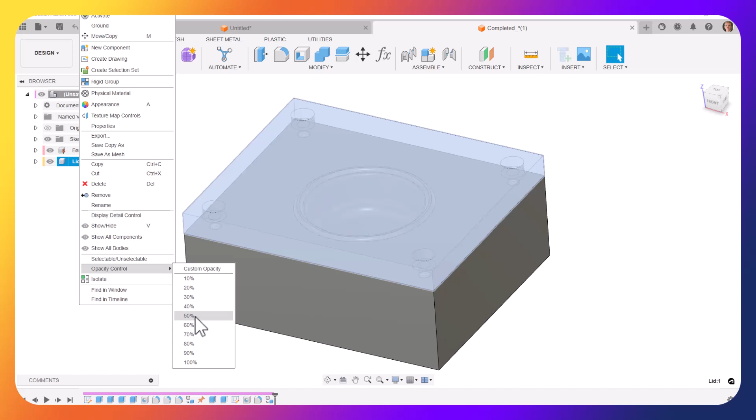Let's take a look at how I put these 4 holes into the lid. First, in order to make this clear to see, I changed the opacity of the lid so that we can see through it and see that these holes in the lid line up with the holes in what I call the base. I'm going to drag back in the timeline to before I created those holes.

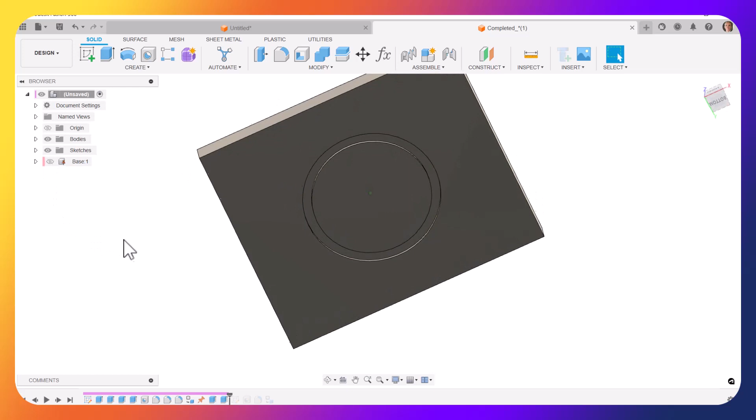So let's drag this back, and here's my lid. I'll turn off the base, and later on I put the fillets in here for the O-ring, but let's go ahead and put the holes in here again.

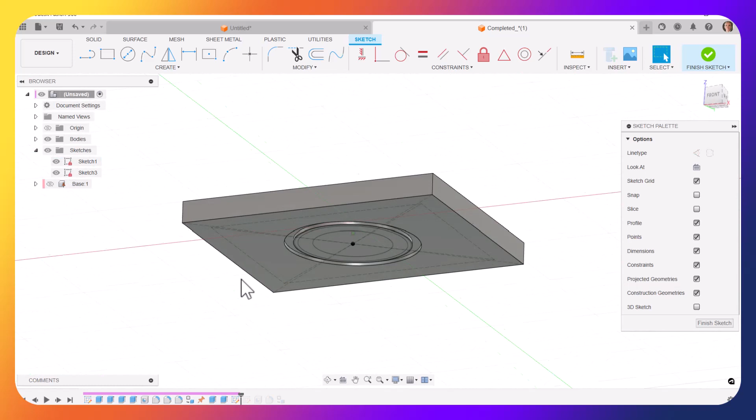So what I did is I started a new sketch on the top of this part, and I'm going to make sketch number 1 visible. Now sketch number 1 is on the bottom of the lid. I need to place my holes from the top of the lid.

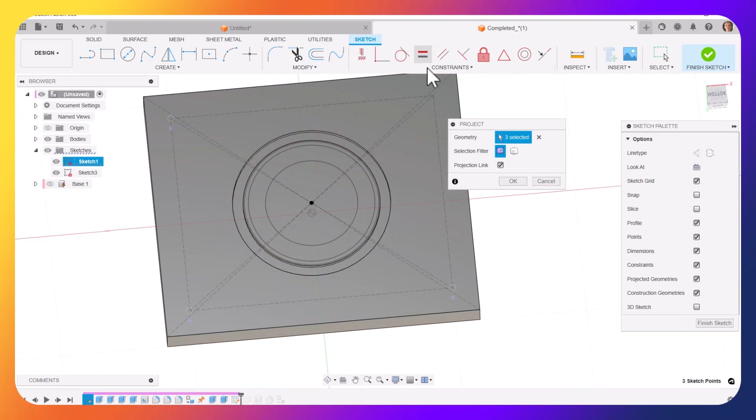So I'm going to hit P on the keyboard, P for project, and then I'm going to select these 4 corners that we use to place the hole in the base. I'll select those 4 corners of that rectangle, and now we see those 4 points projected to the top of the lid.

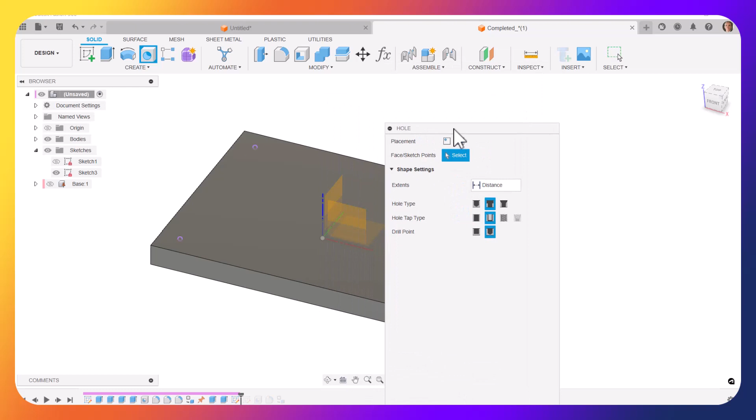I'll turn off the visibility now of sketch number 1, and I'll finish the sketch, and I'll go to the hole command, and I'm going to tell it multiple holes, and I'll select these 4 points.

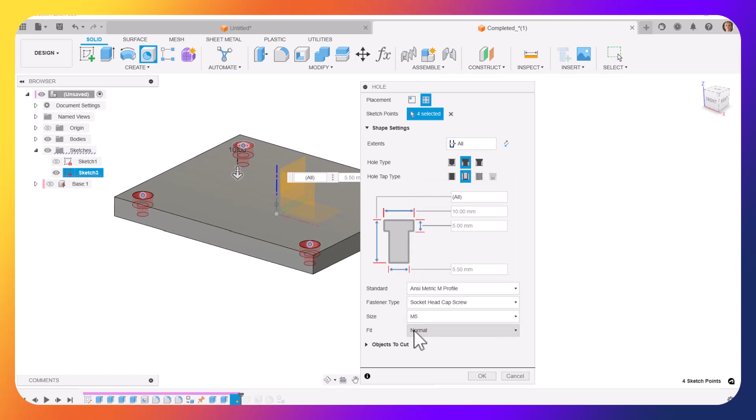I'm going to tell Fusion that I want to go all the way through the lid, and I set it to be counterbore. Now you can set whatever hole type you want. I set it counterbore and a clearance hole, and I set the size for an M5 socket head cap screw. You could select whatever type of fastener you're going to use, and then selected the 4 points.

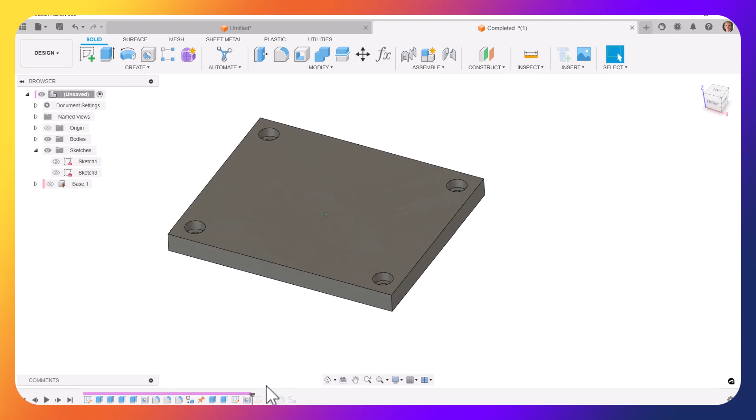Now because I've done this once, it's already filled that information in for me, so there are the 4 holes in the lid. Now I've already done that, so I'm going to undo that and just go back in my timeline to where I had done that. So there are the 4 holes in the lid.

Let's say that I edit sketch number 1, and I set this dimension as 100. Let's say I want it to be the same as that one, so I'm going to change this to 80.

Or maybe if I want it to always be the same as that one, I just click on that and replace that dimension number with this dimension, and then this will be a function of that one. Either way, we see that fx, it's a function of this dimension.

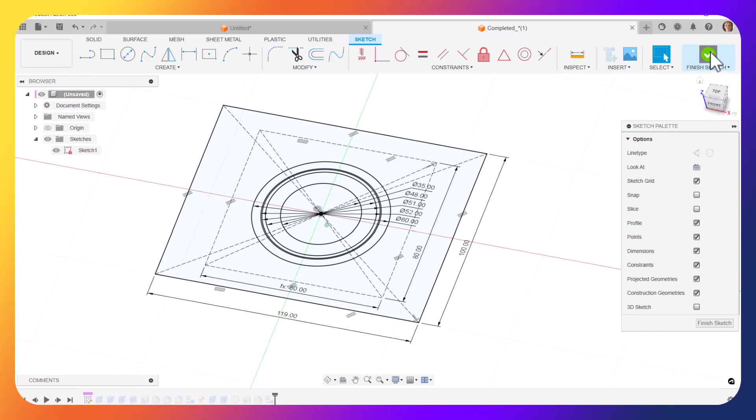When I say OK to this, now it moves those holes for me, and everything stays lined up. The holes in the lid stay lined up with the holes in the base. If I undo that, we see back here the holes were out here, and actually I thought I'd be able to redo that. I can't do a redo, but you saw how that worked.

Let's do one other thing. I'm going to drag my timeline back to where I did the holes in the base. Now if we zoom in here, it might look like there are threads here, but those aren't really threads.

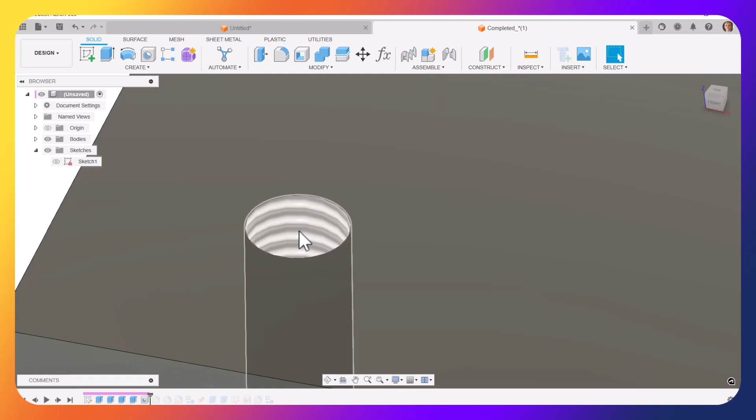Those are cosmetic representation of threads. If we 3D print this, we're not going to have any threads. I'm going to add a chamfer for lead in to this.

So I'll do a chamfer, and I'm going to select these circles. Now notice I'm selecting a circle, not a helix. I'll select those circles, and I'm going to change this, let's say to 0.5. Let's do 0.75 as my chamfer size. And so I put these chamfers in here.

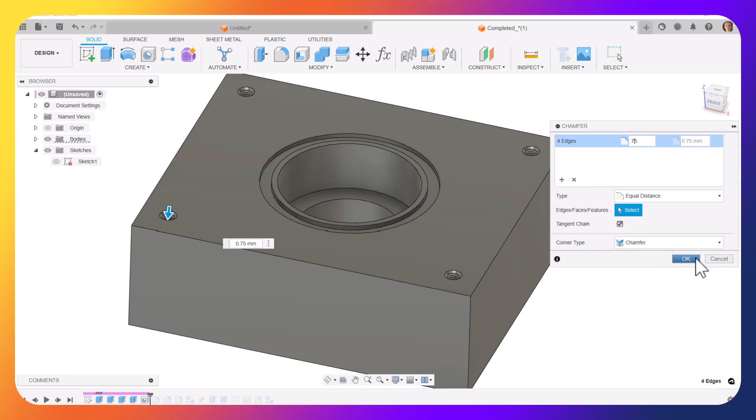Now it's important that you do this in this order. We wanted to select a circle, not a helix. I'm then going to right click on this hole feature, and I'll say edit that feature, and I'm going to change this. Instead of cosmetic, I want those threads to be modeled. So I'll come down here and I'll tell it to be modeled.

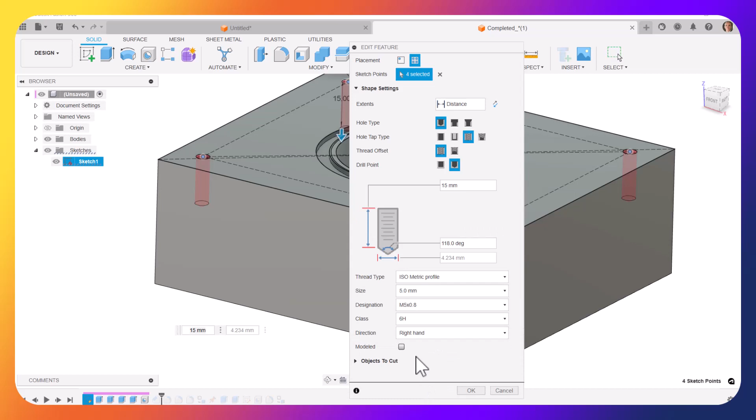Okay, so now we see that we have a lead in for this thread for the fastener to start. And if I take my timeline back to the end, we see our holes are all lined up.

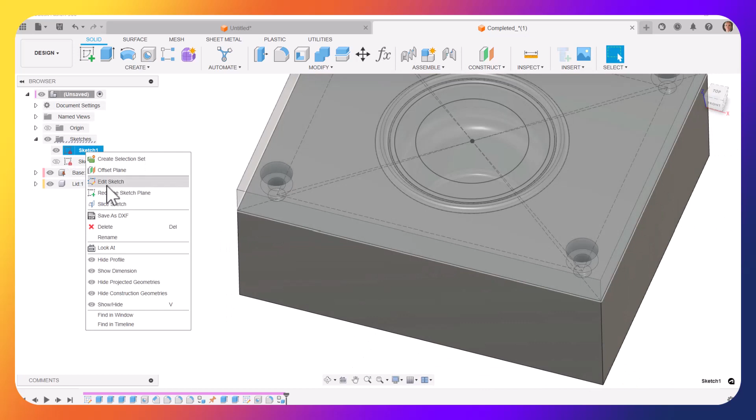And again, if I want to edit that sketch number 1 and change this distance to 80, everything will update because we've done everything with a parametric history to the model. So you see those holes are moved over, everything lines up. I can hide sketch number 1, and if there are any more questions, ask questions.